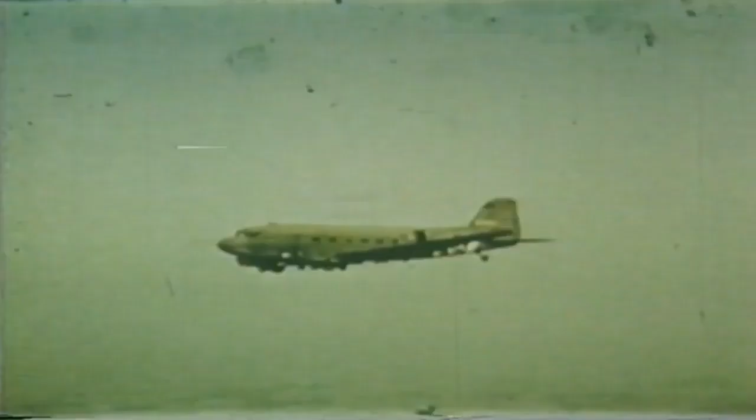Put simply, air transportation is important. To put it precisely, air transportation is the muscle behind the striking force of our air arm. Constant improvements in engine design help the fist strike harder and harder, and constant improvements in engine design for the supporting muscle, air transportation, are no less important.

The engine designer's objective is power for progress, an unending search for the best, most efficient power for flight, a continuing study of factors like speed, weight, shaft horsepower, aerodynamic drag, and operating costs. This is the engine designer's constant challenge.

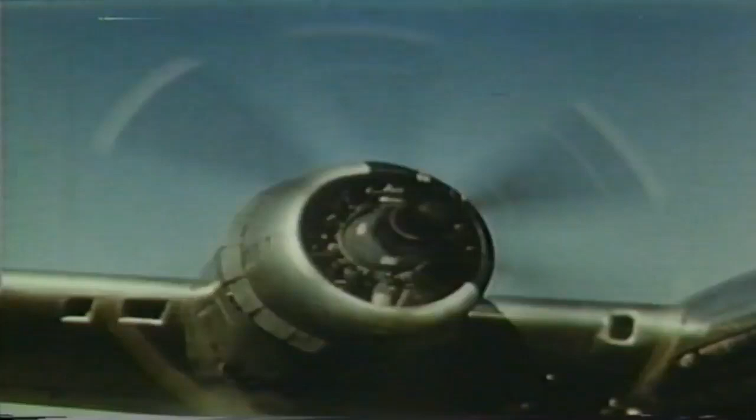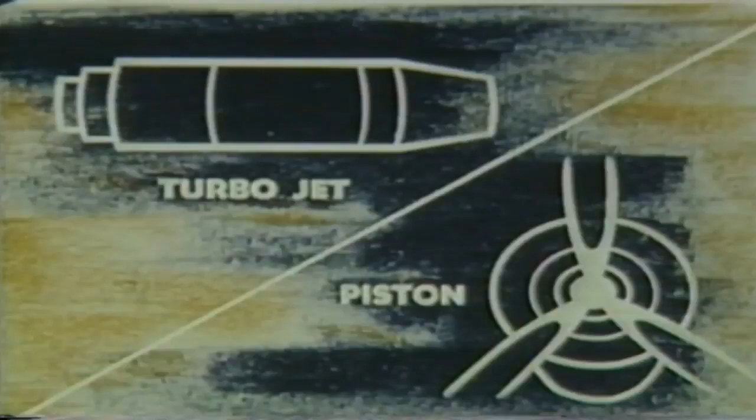For instance, the reciprocating engine is today's most efficient and most complex. The turbojet engine is today's most powerful and most simple in basic power section design. Somewhere in between lies a new kind of power for flight, an engine with the inherent power section simplicity of the turbojet, but providing also the high thrust efficiency of propeller power. And here is the engine designer's solution to the problem.

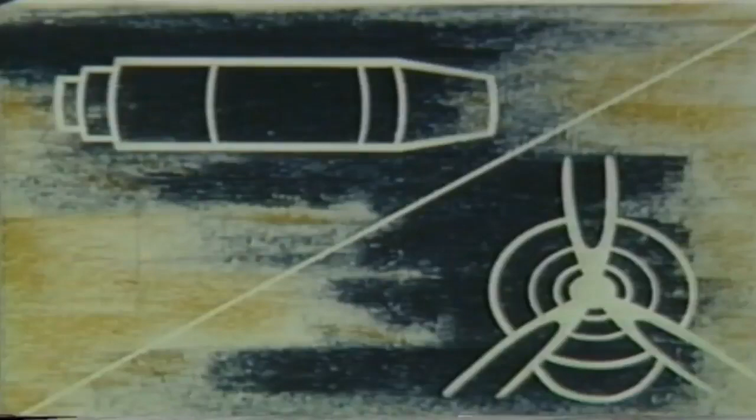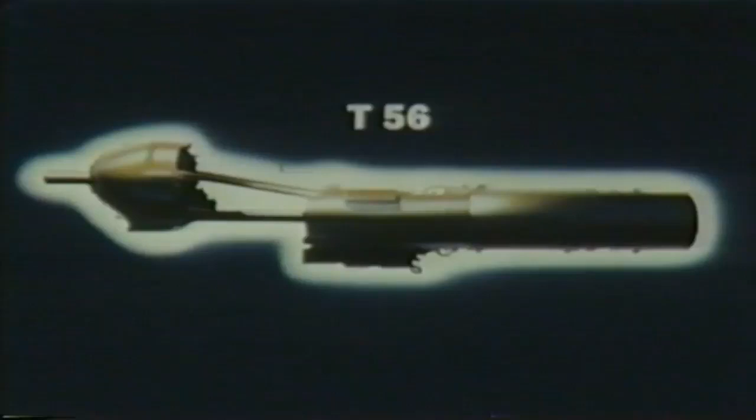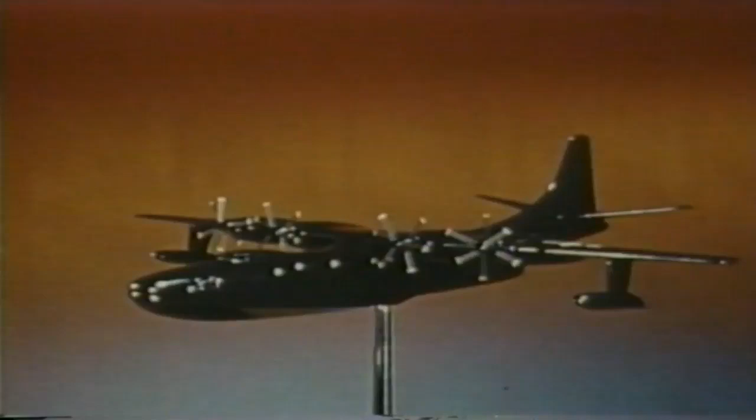A new kind of power for flight, the turboprop engine. More power and speed, less weight and aerodynamic drag, lower fuel costs. Here is power for progress for many types of aircraft, for greater speed, increased payload, shorter takeoff and landing runs, high rate of climb, and most economical overall operation at all altitudes. A turboprop, like a turbojet, is a gas turbine engine.

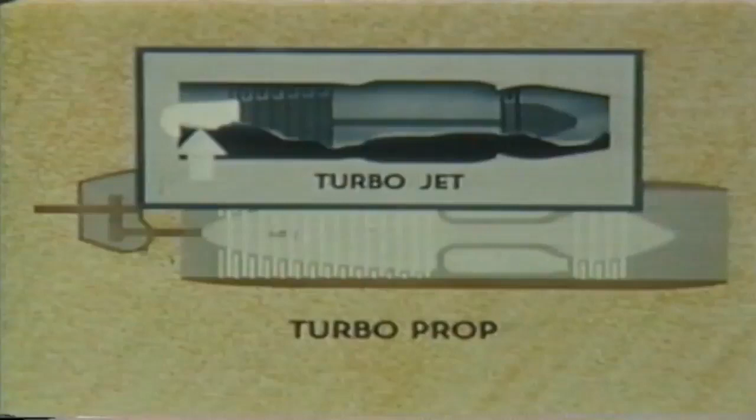Air is compressed and delivered to the combustion section. There, fuel is added, and the mixture is burned. The expanding gases release tremendous amounts of energy. In a turbojet, a turbine absorbs only the amount of energy necessary to operate the compressor and engine accessories. The remaining energy becomes jet thrust by reaction from ejection of the exhaust gas at high temperatures and high velocity.

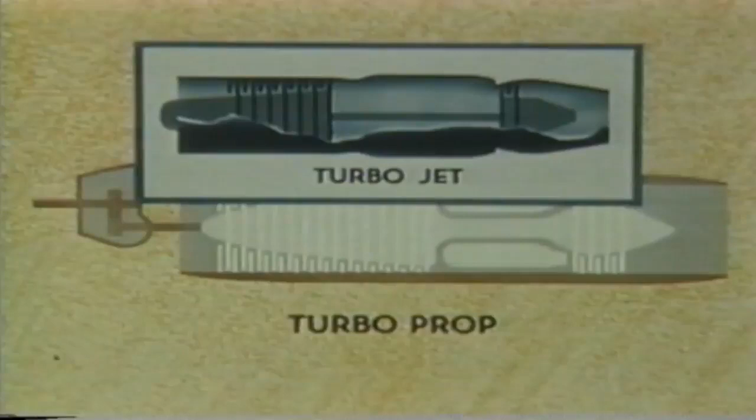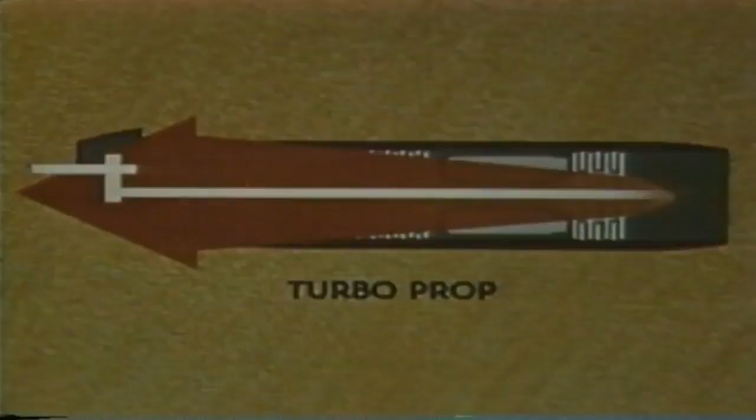In a turboprop, the turbine is designed to absorb maximum energy from the expanding gases. This energy is converted to shaft horsepower and used to drive a propeller through a reduction gearbox, as well as the compressor and engine accessories.

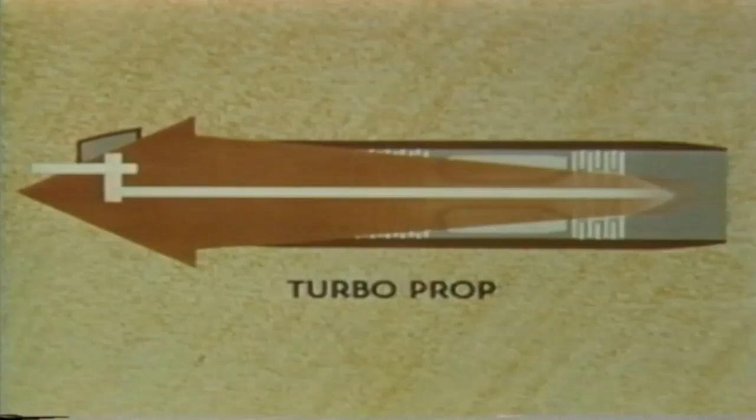About 10% of the turboprop engine's propulsive force is jet thrust, but all the rest, the main propulsive force, comes from the propeller. The turboprop engine has many advantages over the compound reciprocating engine of comparable power. First, it has less than one-third the cross-sectional area, and therefore less aerodynamic drag.

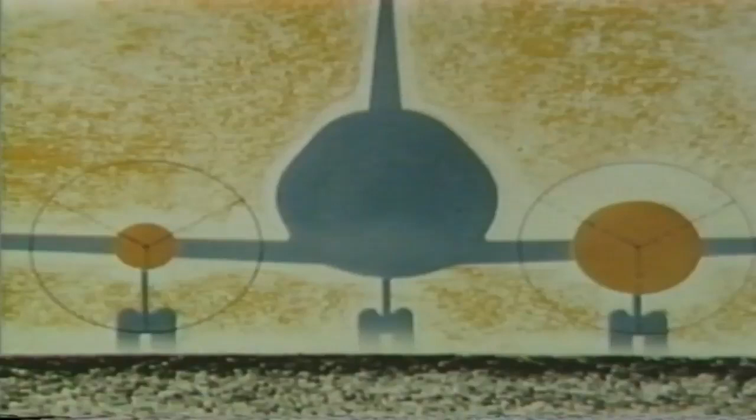Second, in terms of power to weight, the turboprop holds a 2.5 to 1 advantage. The compound reciprocating engine delivers about 1 horsepower per pound of weight. The current turboprop delivers 2.5 horsepower per pound of weight, and this engine has ample room for power growth.

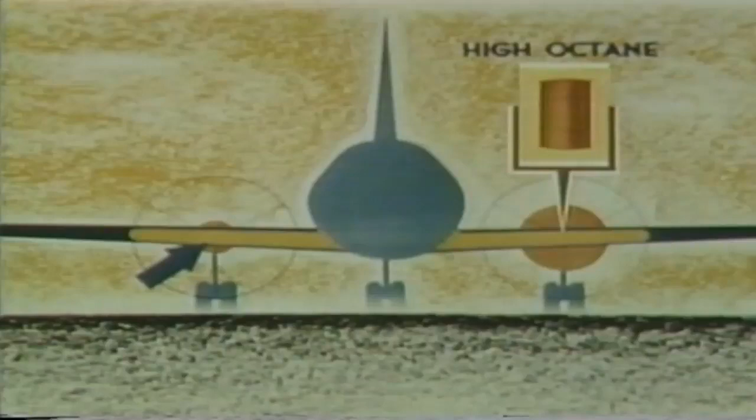Third, the two engines are roughly comparable in the use of pounds of fuel per horsepower per hour, even today. But whereas the reciprocating engine requires high-octane gasoline, the turboprop, like the turbojet, can operate on any good turbine fuel, which not only costs less, but is in far greater supply. Moreover, the engine's lower weight permits...

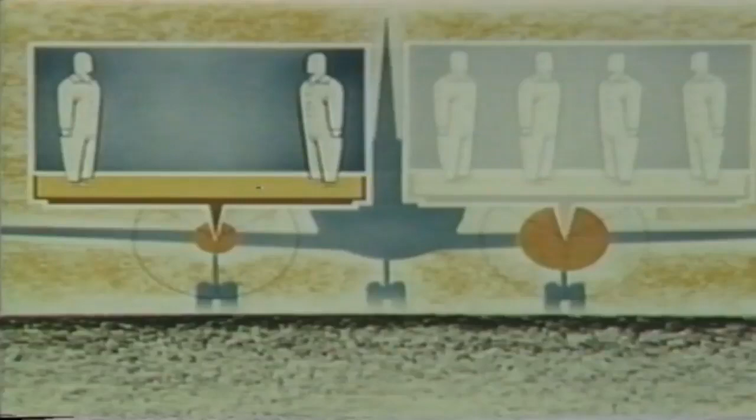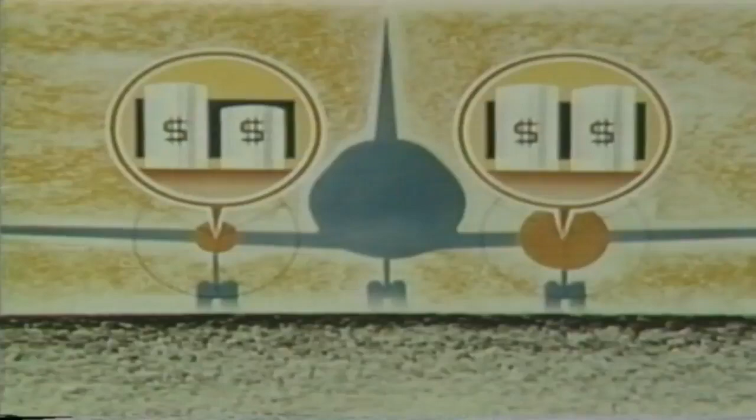Routine check work and minor overhaul on the engine itself, and less work is required on the airframe because of reduced vibration. Fifth, the simpler design of the turboprop results in more horsepower per dollar expended in manufacture. The difference in cost is almost the equivalent of one spare turboprop for every four.

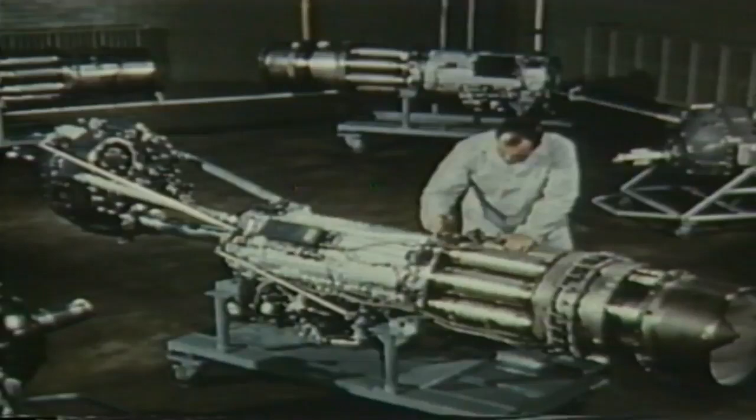These then are some of the advantages of the turboprop engine, advantages which mean progress in aircraft power for air transportation. Let's see how this new kind of power has already reached practical availability.

Development began with a request from the Navy Department, Bureau of Aeronautics. But the request wasn't for a specific engine. It was for any engine that would enable an airplane to meet certain specific requirements.

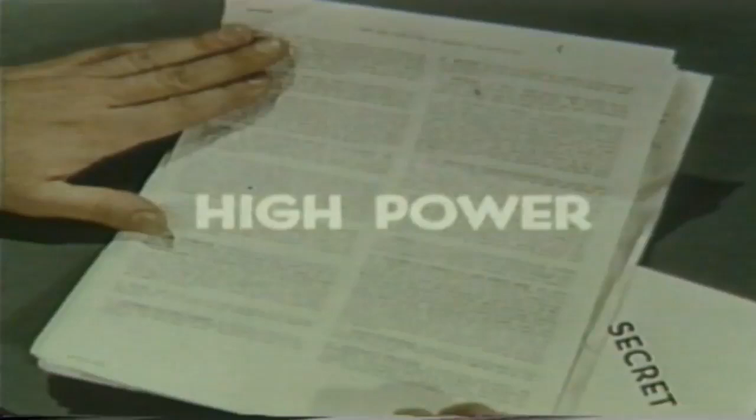This took an engine with high power, low weight, small size, low fuel costs. This request was for an engine which would enable an airplane to perform missions not possible with any known engine.

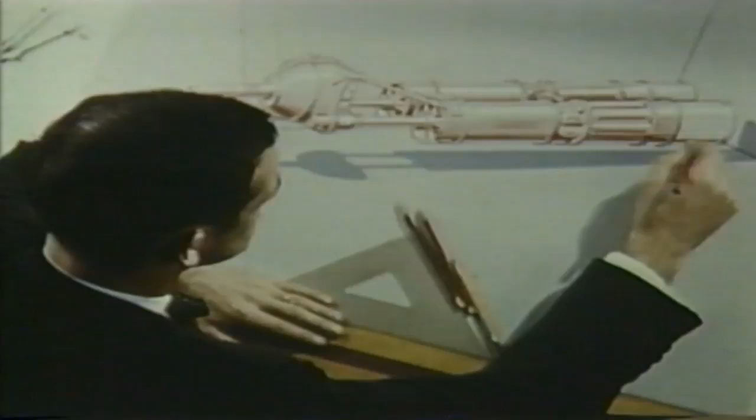And detailed study ruled out either the reciprocating engine or the turbojet. And so a new concept was born, the turboprop engine.

The specific Allison proposal was for the T-40, an engine with twin power sections driving a contra-rotating propeller which could be clutched to either or both power sections for unusual flexibility of operation and economical cruise. To expedite development, the T-38 was then designed, with gearbox and propeller driven by a single power section.

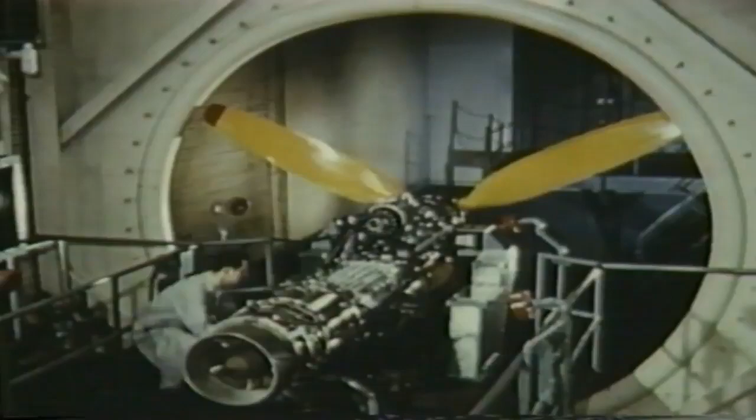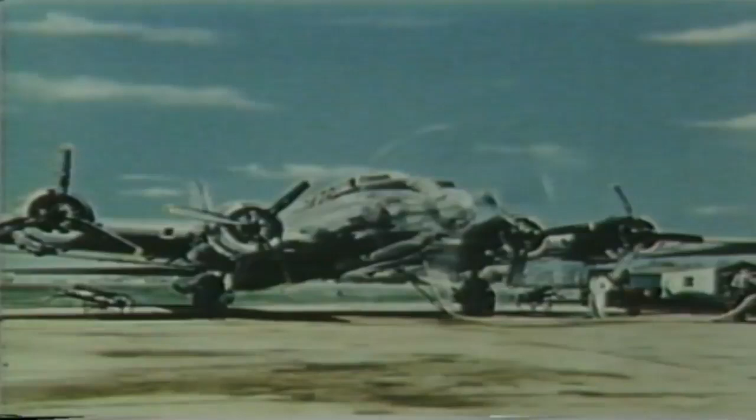Following tests of component parts, testing of the complete unit proceeded until the engine was ready for flight evaluation. A test bed was installed in a B-17. Standard flight evaluation tests were made, including tests for temperatures and pressures throughout the engine. One result of this work was the development of simplified coordinating and propeller controls.

The next step was to prove the turboprop engine as a practical power plant on its own. Military interest in the advantages of turboprop power for both existing and future aircraft had reached the flight test stage. For instance, the Convair XP-5Y flying boat, the Douglas XA-2D Sky Shark. Could turboprop power do a job in these planes?

Let's see. The XP-5Y long-range flying boat, built by Consolidated Vultee Aircraft Corporation, was the first American aircraft to fly wholly on turboprop power. The 4 Allison T-40 engines and dual rotation Aero Products propellers give this 70-ton transport a power-to-weight ratio far in excess of many World War II fighters.

It was test flown to evaluate the production version, the R-3Y Tradewind.

The XA-2D carrier-based attack plane, built by Douglas Aircraft Company, was the first American turboprop-powered bomber to fly. The Sky Shark is powered by an Allison T-40 engine with dual rotation Aero Products propeller. The XA-2D can carry a greater payload than any known jet bomber or fighter for the same expenditure of fuel.

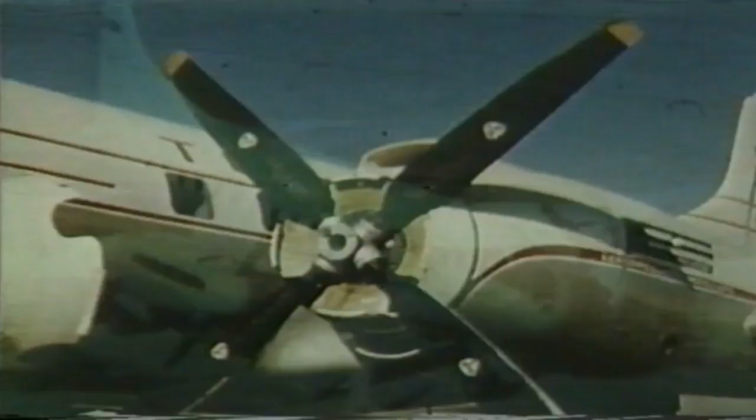In 1950, Allison purchased a standard Convair 240 for test purposes. One T-38 model turboprop was installed in each nacelle by Convair, and this became the Allison Turboliner.

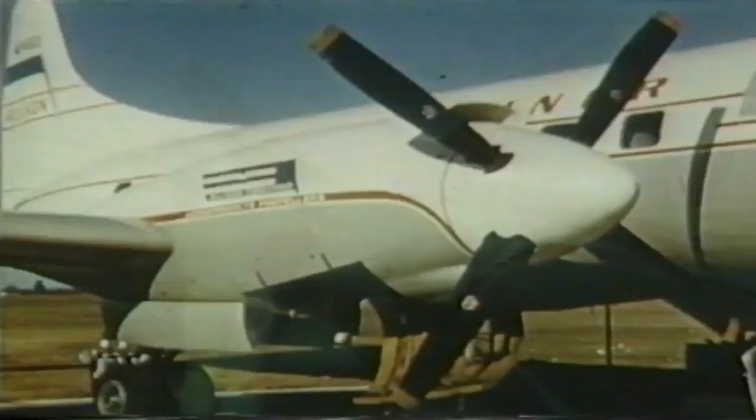Because of landing gear design and other practical considerations, the standard nacelles were used. You can easily imagine how much smaller the nacelles would be in size and cross-sectional area if designed for an optimum turboprop engine installation.

Ground running began in November 1950. Three months of vibration and stress analysis uncovered no adverse vibrational characteristics in the engine, propeller, or nacelle.

Early flight tests, coordinated with the ground running program, began in December. Flight information, accumulated during hundreds of operating hours to date, has resulted in further proof of the advantages of the turboprop engine and provided valuable information leading to still further improvements in engine design.

Remember that in the early phases of its development, the advantages of the turboprop engine were largely demonstrated by the T-38 and the T-40. Now let's look at the T-56, an advanced model sponsored by the United States Air Force.

Progress in design has resulted in more power, higher possible flight speeds, and improvement in fuel consumption. Let's consider in some detail the specifications and characteristics of this representative turboprop engine.

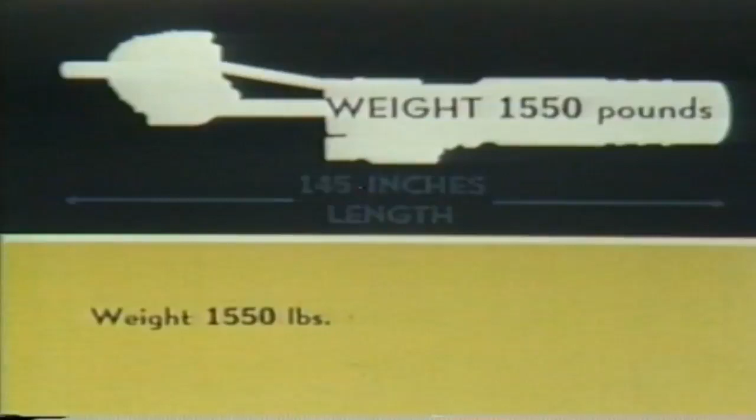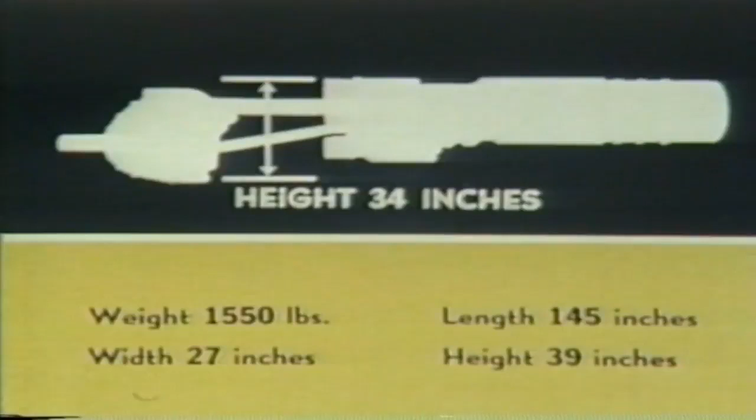Weight is 1,550 pounds maximum. Total length is 145 inches. Width, 27 inches. Height, 39 inches, or 34 inches with the gearbox offset down. This choice of gearbox position, up or down, gives further flexibility to the designer in location of the power plants and centerline of propeller thrust.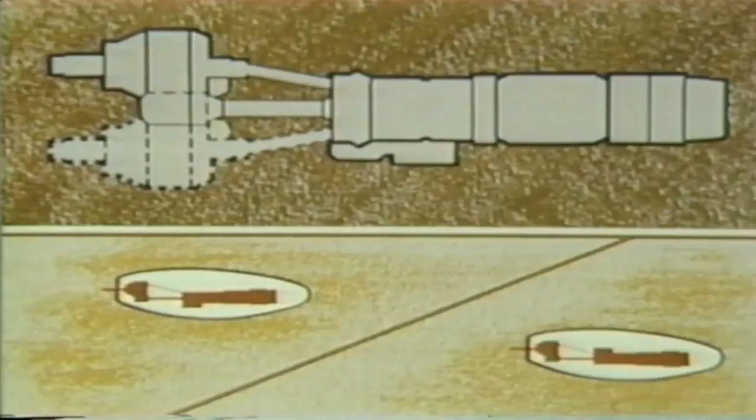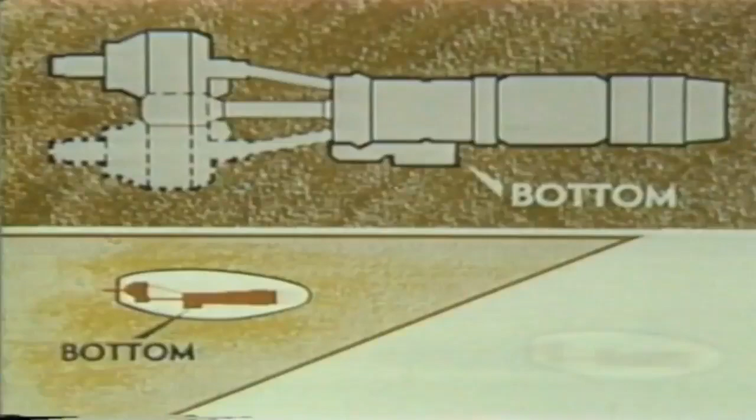As a further option for the designer, accessories may be top or bottom mounted on the power section. A constant speed engine in flight, the T-56 is rated at 13,820 RPM through all operating phases.

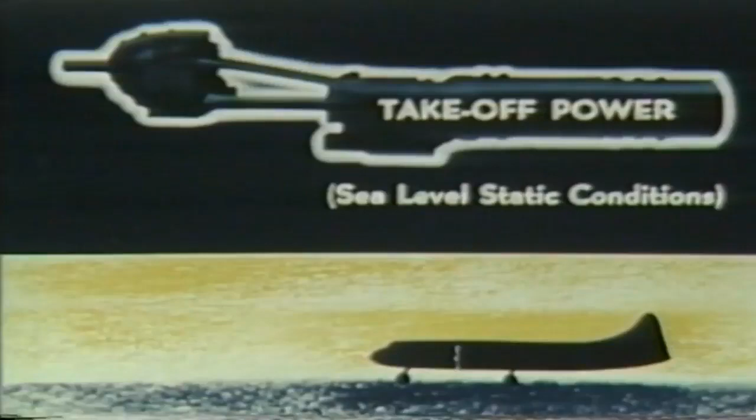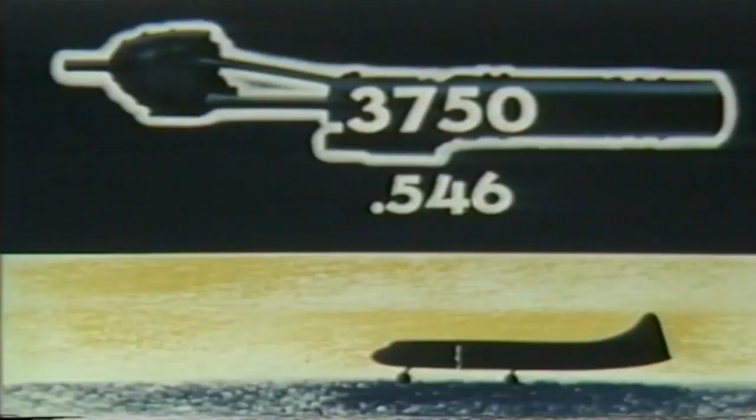Here are its power ratings. First, takeoff power at sea level static conditions. Propeller shaft horsepower, 3,507. Jet thrust, 608 pounds, making equivalent shaft horsepower, 3,750. Specific fuel consumption is 0.546 pounds per hour per equivalent horsepower at takeoff.

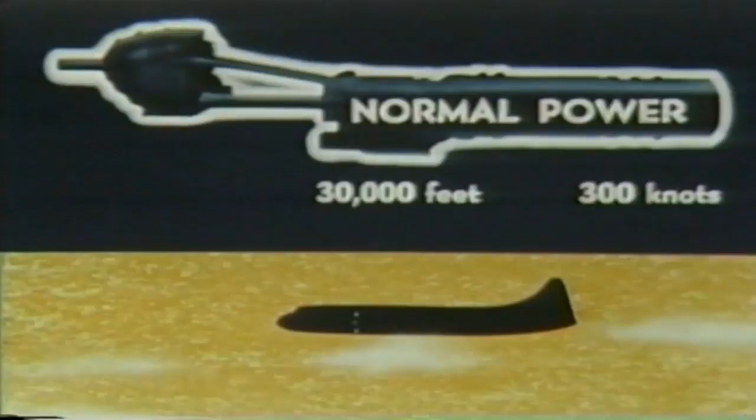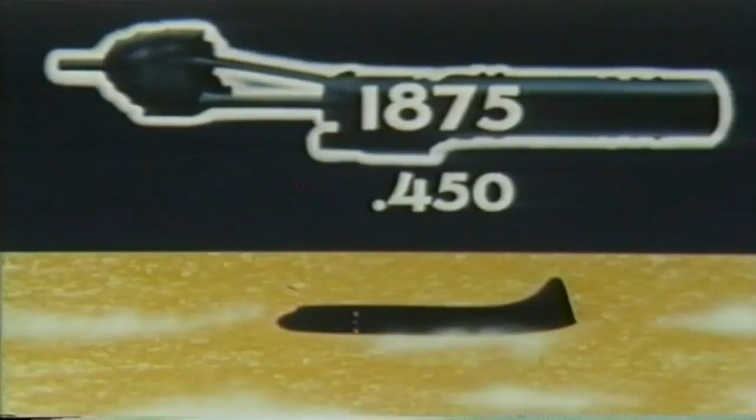Second, normal cruise power at 30,000 feet and 300 knots. Propeller shaft horsepower, 1,750. Jet thrust, 125 pounds, making equivalent shaft horsepower, 1,875. Specific fuel consumption is 0.450 pounds per hour per equivalent horsepower at this operating condition.

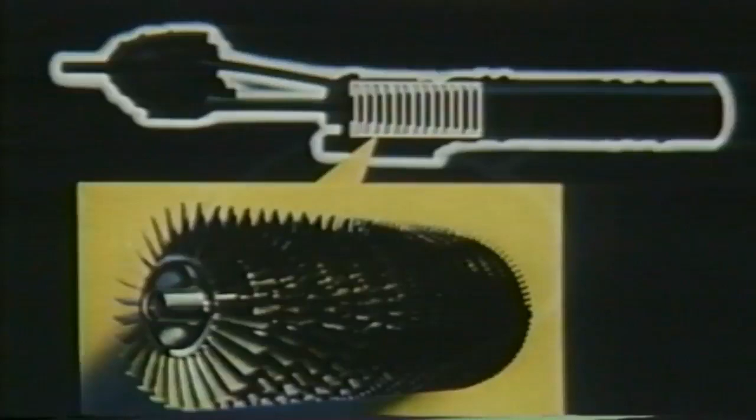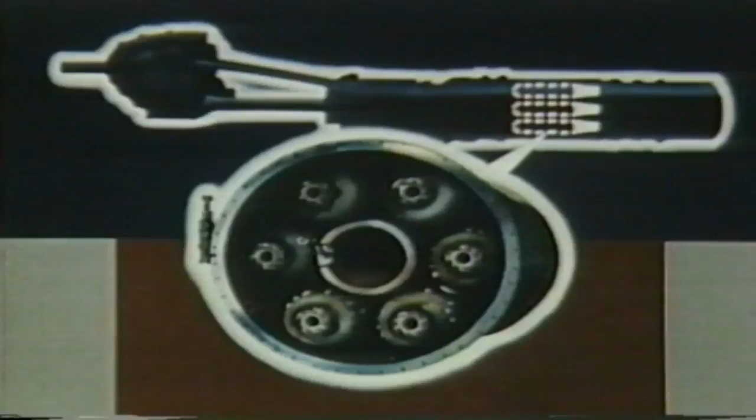The 14-stage all-steel axial flow compressor handles more than 30 pounds of air per second at a compression ratio of more than 9:1. The combustion assembly consists of 6 inner burners within a steel outer shell. Individual fuel nozzles feed each inner burner. Once started, burning is continuous.

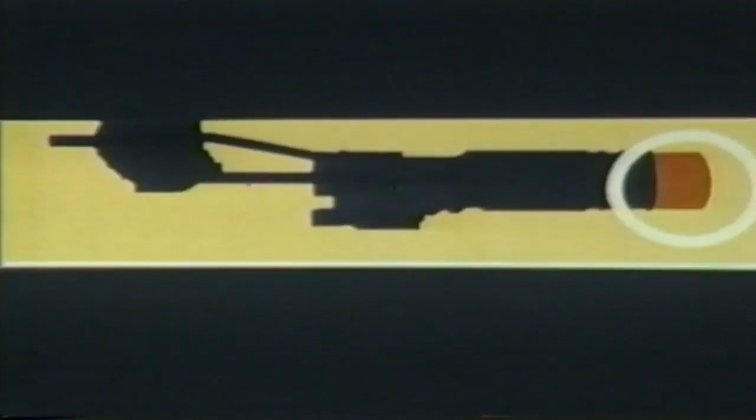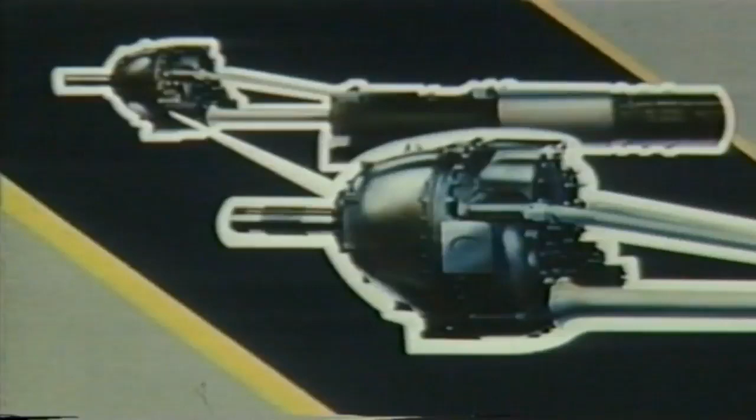Most of the energy from the hot gas is absorbed by the 4-stage turbine. The remaining energy results in thrust as the gas is ejected. The power section drives the integrally mounted reduction gear assembly through an extension shaft. In a 2-phase step-down, the reduction gear assembly reduces power section speed to optimum propeller shaft speed in a ratio of 12.5:1, from 13,820 RPM down to 1,106 RPM.

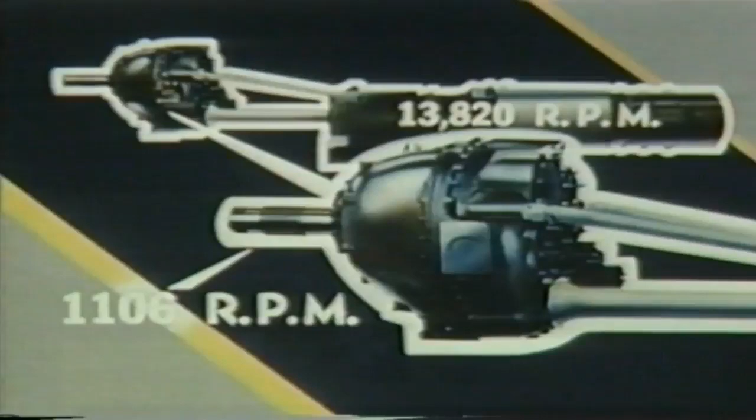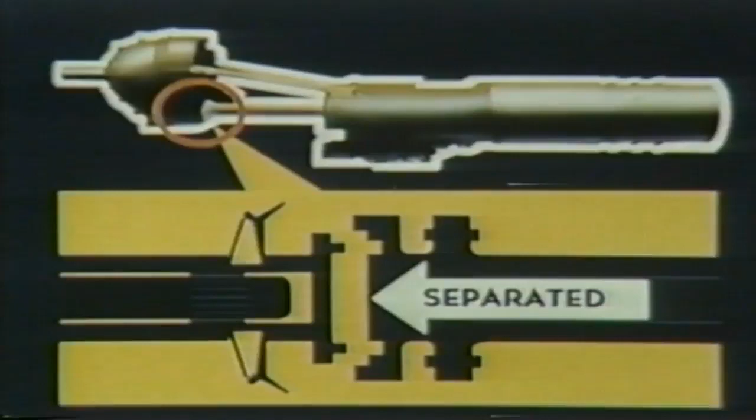At the point of connection between gearbox and extension shaft, a safety coupling is provided. It automatically separates gearbox and power section if ever a negative torque of predetermined magnitude should be transmitted through the propeller. The safety coupling automatically re-engages when the gearbox speed matches that of the power section.

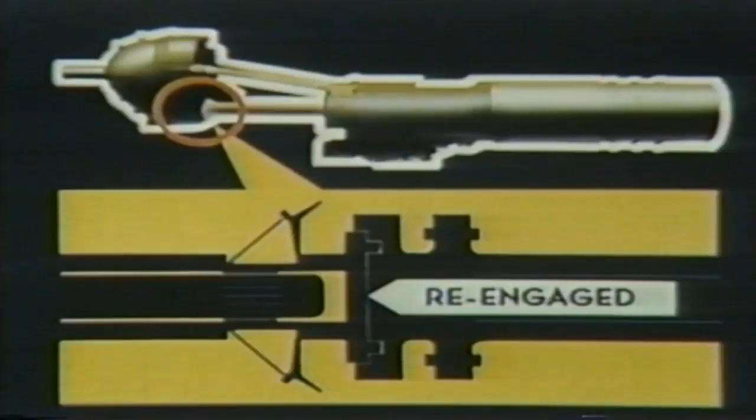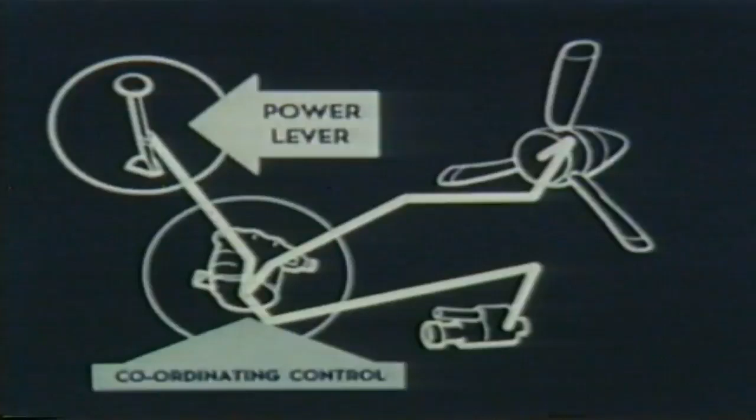The pilot has to move nothing but the power lever to change the power setting for a particular operating condition. Power adjustments are made through the engine coordinating control, which automatically coordinates fuel flow and propeller blade angle.

The engine fuel system features a dual fuel pump arrangement. If the operating pump should fail, the bypassing second pump automatically overrides to provide the necessary fuel supply.

Now let's consider what all these advantages of the turboprop engine mean in terms of operational characteristics. For instance, operational simplicity. The piston engine pilot has many operating controls to keep in manual coordination for every phase of operation, from starting to landing.

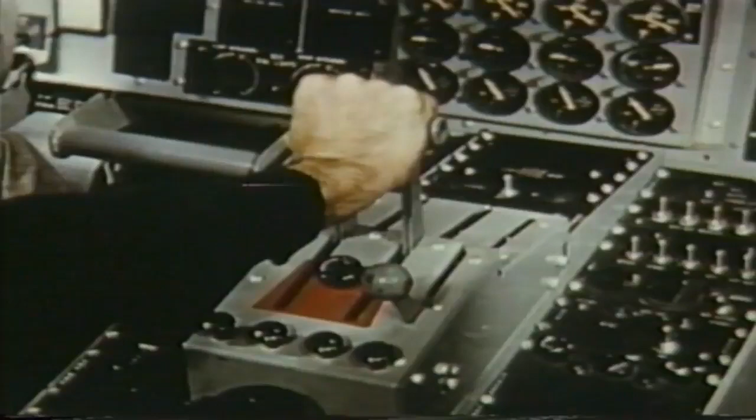The turboprop pilot has but one operating control, the power lever. A mechanical electrical coordinating control mounted on the engine automatically provides for all requirements of ground and flight operation.

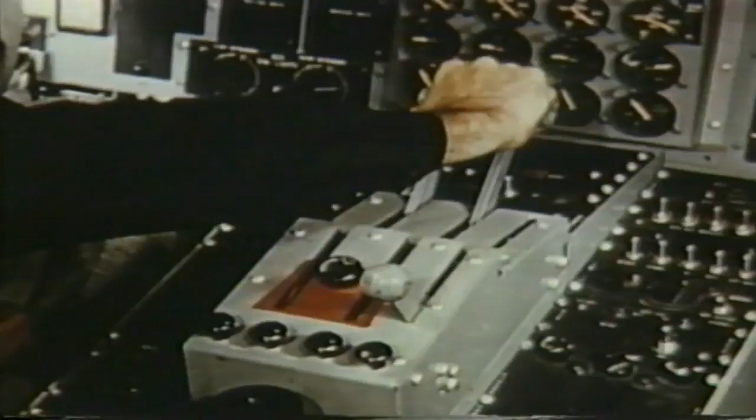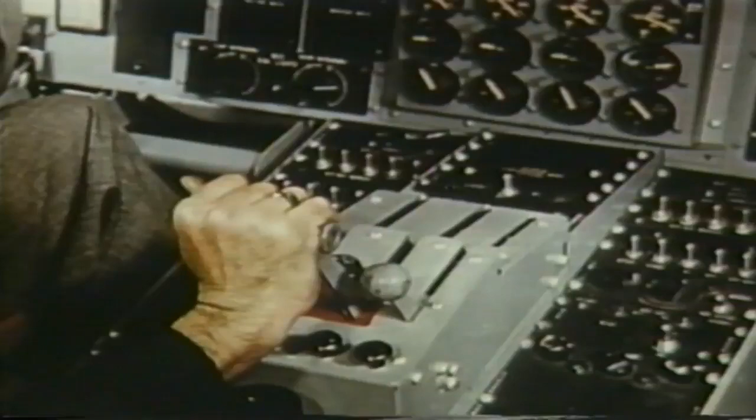The pilot, in turn, is automatically provided with a full range of thrust selection, from zero to maximum positive, and from zero to maximum negative. We shall see how useful this is in a moment.

Here's another operational characteristic. In flight, the Allison turboprop is a constant speed engine, while in ground operation, engine speed is variable. And starting is simplicity itself.

After the normal presettings are made, the pilot simply selects Start with the power lever, then pushes the start switch. Now a self-contained starting unit takes over. In a matter of seconds, the engine fires up and stabilizes at ground idle RPM.

At this operating condition, the propeller is delivering zero thrust. The extremely useful range of thrust selections soon becomes evident. Complete control of the airplane is achieved through smooth, continuous changes in thrust values, from positive to negative.

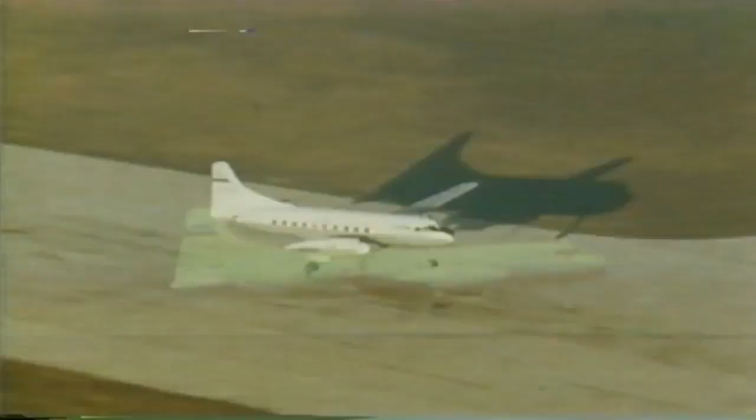For instance, takeoff runs in the Allison turboliner have measured out to less than 2,000 feet. Rate of climb is 2,500 feet per minute at an indicated airspeed of 220 miles per hour.

Instantaneous availability of full thrust is especially important in go-arounds. With the constant speed turboprop engine, full takeoff power is immediately available for emergencies.

During letdown, coordinated control between the fuel regulator and propeller permits a steep angle of descent. As the power lever is retarded, the coordinated effect of reduced fuel flow with the propeller governing to maintain 100% RPM sets a high engine speed and flat blade angle, which produces the desired braking effect on the airplane.

Immediately after touchdown, moving the throttle back to the start position sets the propeller to minimum torque blade angle, markedly increasing the drag effect.

Now, to further shorten the landing run, the pilot selects reverse thrust. Up to 80% of takeoff power is available in the reverse regime.

These are some of the primary operational characteristics of turboprop power. The T-56 turboprop engine, then, with its advanced design, power rating, and operational characteristics, is the key to the future for military and civilian air transportation.

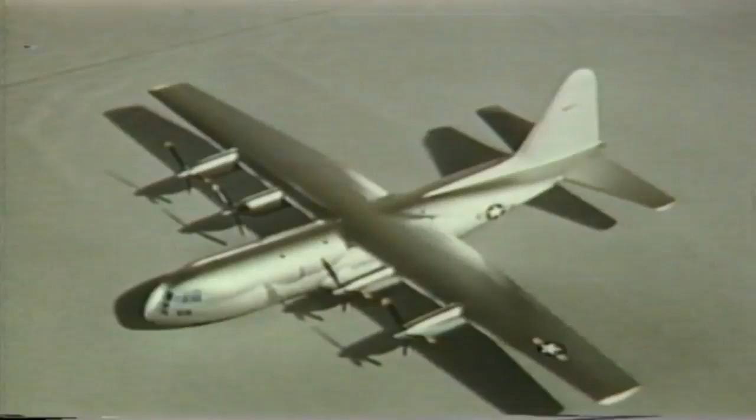The first United States Air Force transport designed specifically for turboprop engines is the Lockheed C-130, powered with 4 Allison T-56s. Planes like this can fly faster and higher for high-speed, long-range personnel transport, as cargo planes for heavy equipment, as hospital planes for litter cases.

And thanks to shorter takeoff and landing runs, they can operate in unimproved forward areas.

Another application of turboprop engines in the transport field is the C-131C, a conversion of the twin-engine Convair 340 to Allison T-56s. Usefulness of turboprop transports is not limited to military application. Commercial operators also look to these new type aircraft to carry greater loads at higher speeds and with better economy.

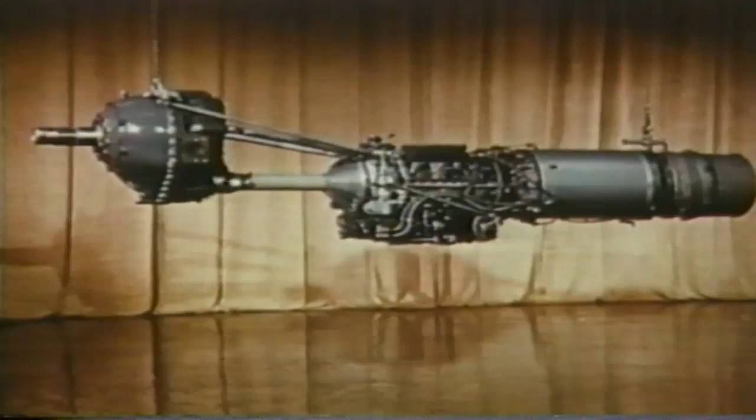But the future of turboprop engines has only begun. The basic power section can be adapted for marine power, stationary power plants, the helicopter, and other vertical takeoff requirements. For all high-speed, load-carrying flight requirements, it seems inevitable that turboprop engines will supplant piston engines in military and civilian aircraft.

The Allison turboprop engine, simple, compact, and powerful, opens new horizons of power, efficiency, and performance. It's today's power, today's new power for flight.